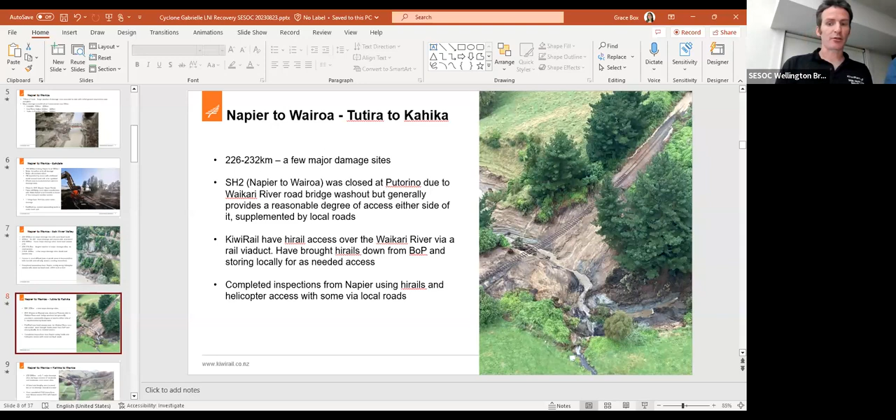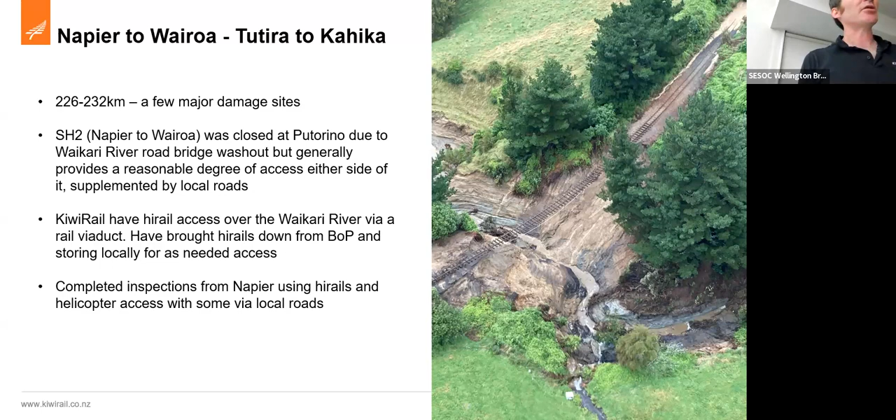Sweet, so big washout here. That was a 1.5 by 2 meter old arch culvert, so it's not like it was a bridge that washed out. It's about 50 to 55 meters long, that bit of hanging track, and about 15 meters deep. And it wasn't even a named stream that did that.

Then Kahika, all the way to Wairoa. Not meaning to downplay the damage, because there is a lot, but it's far more the equivalent of a major storm event for us. Only one major damage site, quite a few moderate and tons of minor ones, but it's not the sort of stuff that we would enter into with an alliance to deal with.

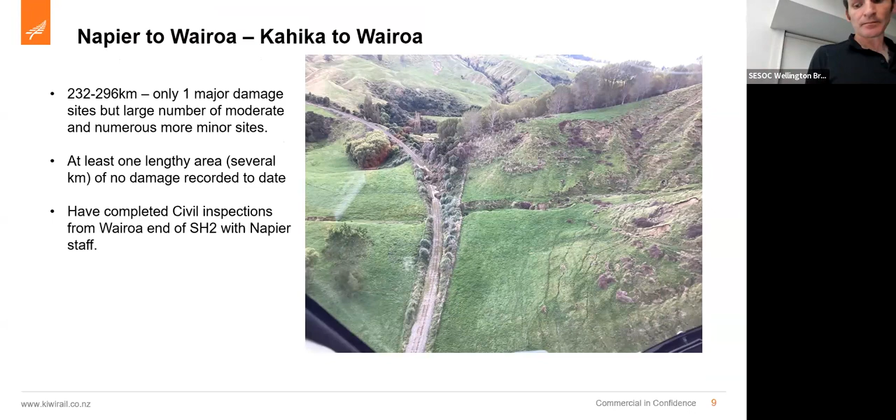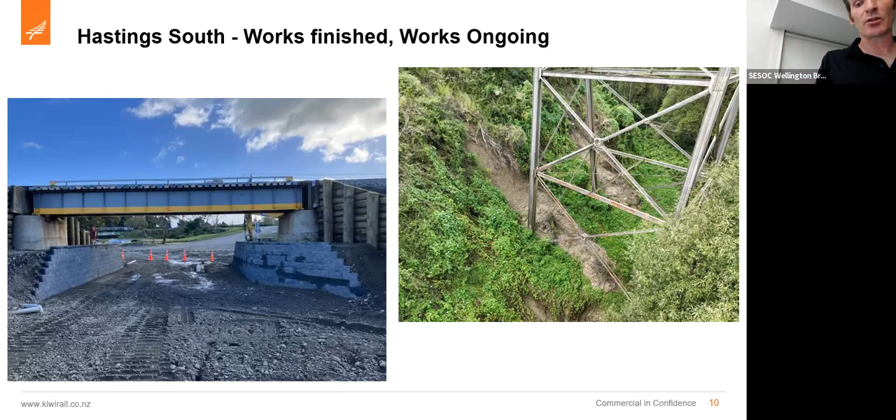But then the bigger piece, and we're going to spend a bit of time on this one, is between Napier and Hastings. So starting off with the rivers, because the rivers, and being from Hawke's Bay, I thought I knew the rivers, and learnt an awful lot about them, and also how they've massively shaped the forming of Hawke's Bay.

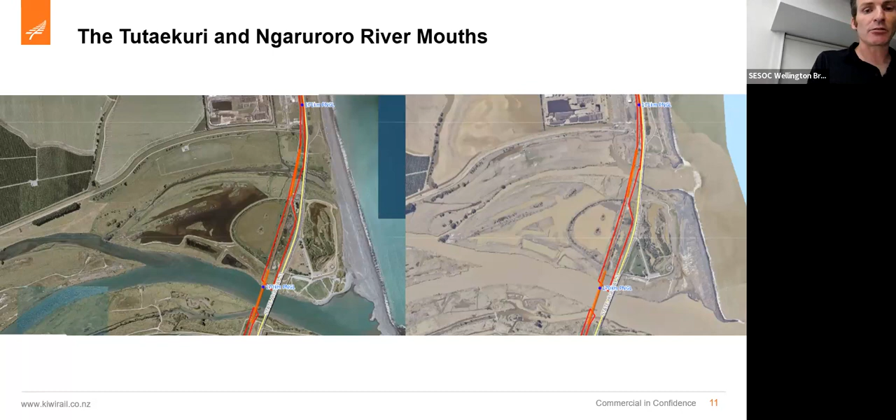And in here, Bridge 217 got taken out. But just stepping out a bit to look at, it's not Hawke's Bay as a whole, but it's the area between Heretaunga, Hastings, and Napier Ahuriri. So you've got the Tutaekuri as the upper river, and the Ngaruroro, and you can again see a nice green area, and then very brown is the Ngaruroro.

It didn't blow its banks, it overtopped, and it overtopped into Pakawhai, which is in between, and it overtopped into Twyford and some other areas down the bottom of the screen. At the same time, the Tutaekuri blew its banks in a whole number of places—I can't tell you exactly how many, but I'm pretty sure it's over a dozen. Massively, it blew its banks at Awatoto, and the water went 3.5 kilometres north, along an area with Ravensdown, a tannery, some animal processing plants and such, and caused a huge toxic hazard.

So when we were going in there, we had to be in hazmat suits, and they'd wash your vehicles down and stuff. It was full on in there, and that water combining took out Bridge 217, and I'll show you that in a bit. But first, a bit of the history of these rivers—I knew some of it, but learned a bunch more.

So the Tutaekuri used to flow and outlet up in Ahuriri, probably about 8 kilometres north of there. In the 1920s, it was causing lots of flooding problems, so there were schemes to divert it. Then the Hawke's Bay earthquake happens in '31, kills about 80-something people in Hastings, over 100 in Napier, and causes massive uplift—metres of uplift—which makes diverting the Tutaekuri even more pressing.

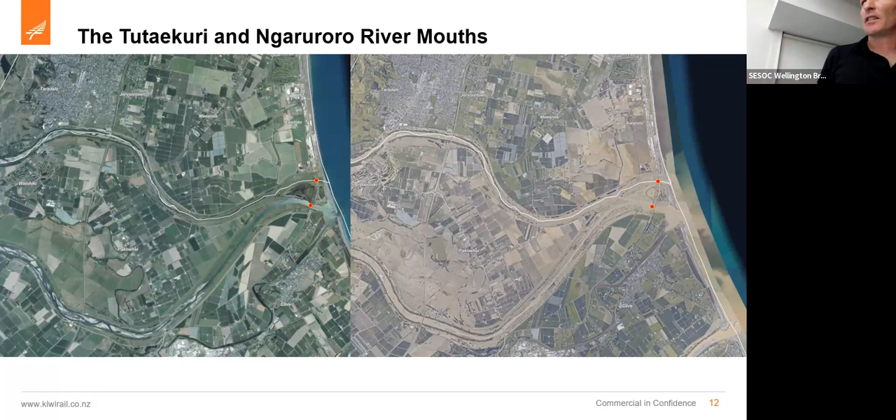And actually the cyclones proved it was somewhat resilient, but not so for Bridge 217. So that's what it looks like after the storm.

So I mentioned all of that damage up at Awatoto. There was no water there before—this is probably the Waitangi stream, I think—and it's become a bit more part of the Tutaekuri. So that 1960s change, most of the water from the Tutaekuri got diverted to go under Bridge 216, and this is just a bit of an outlet.

Some people—there were proposals to change the road bridge into a culvert back in about 2004. Railways objected to it. I don't know if any of the people that objected are in the room, but I thought that was quite a smart thing to do, because it's shown it does need to be a substantial waterway.

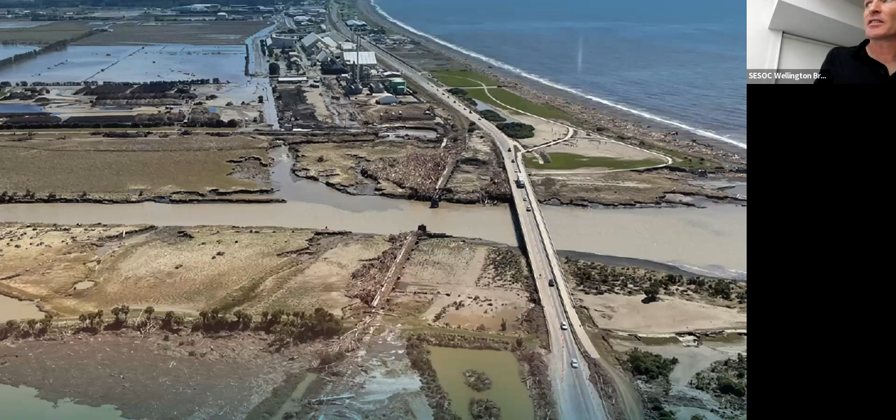Yeah, so look, that's what it looked like straight after. You can see the debris and such, the missing bridge. And that's what it looks like on Monday, I think that photo's taken. So yeah, it's been a great bit of work, and we're hoping to open that in September.

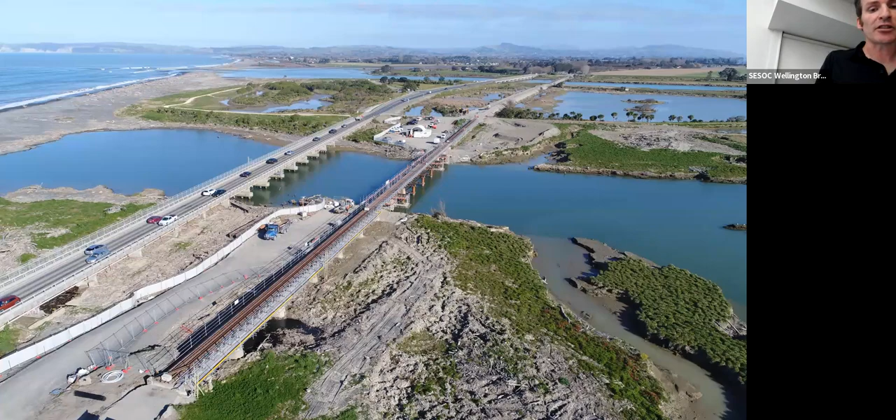There's still a bunch of work to do. The rail's not on the bridge yet, but a lot of other stuff is. And there's another view.

This one's not so much about bridging, but I'll talk about Eskdale a bit, and it's about rivers. So here's Pete Marsh, the ganger for Napier and Wairoa, standing on what used to be the railway track. I think it's on its original alignment, but certainly not in the upper picture. You can see the railway track here, another bit over there, and a car that's almost impaled with rail all over the place.

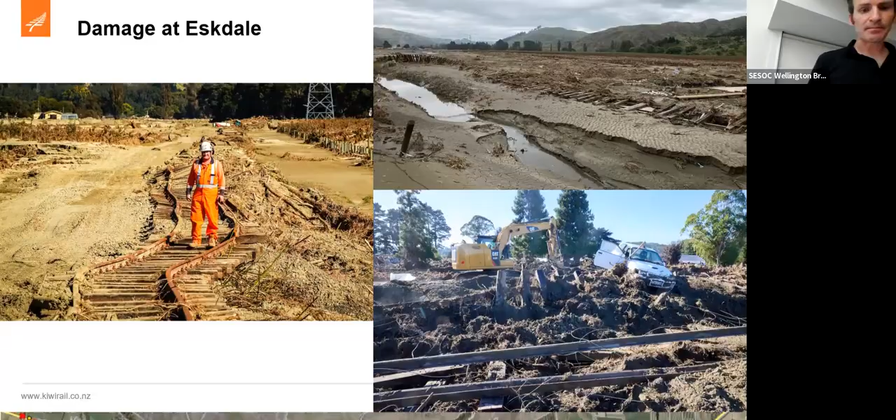Again, before and after - the green is before, and Eskdale's awesome. Well, Eskdale used to be awesome, sorry. Lots of vineyards, breweries, there was a girls' boarding school, Hukarere, lots of cool stuff at Eskdale. Bank to bank, pretty much the hills on either side of Eskdale is where the water and silt reached, and you've got that brown sway through there. So Eskdale is hugely affected, and the rail as well.

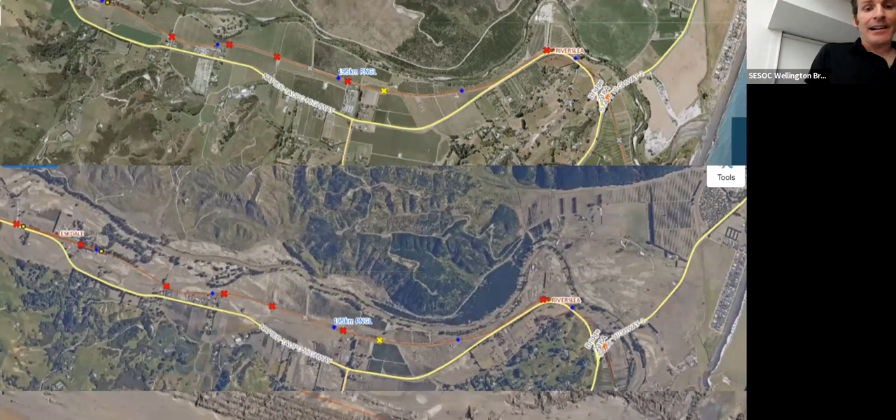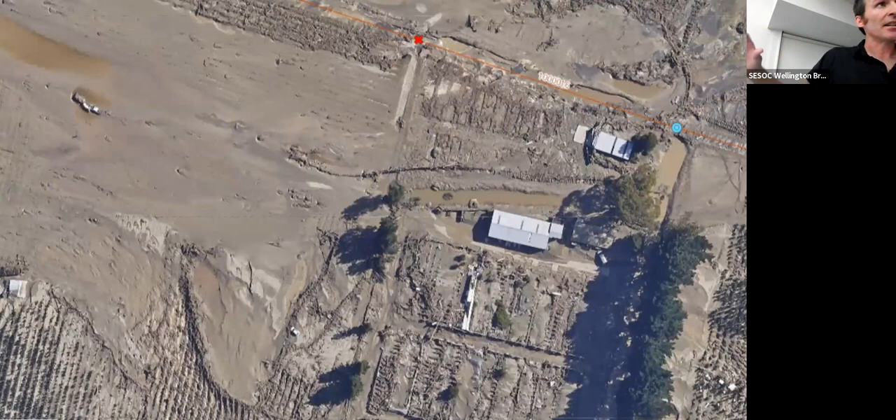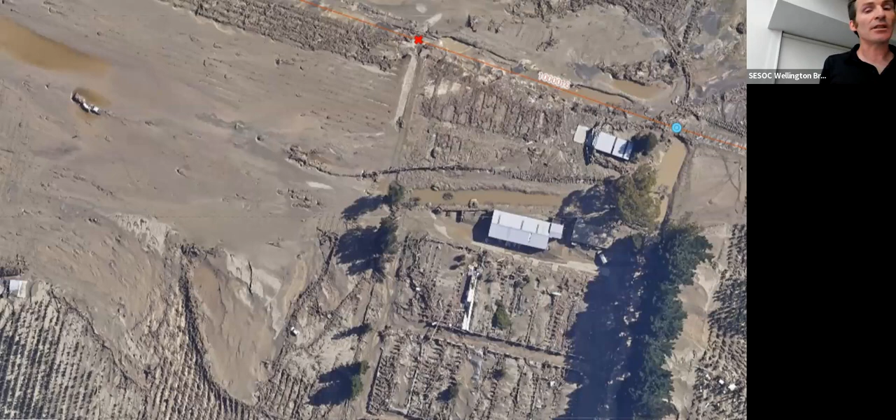That red line is the rail alignment, and some points of interest - hopefully you can see the mouse. That's a piece of rail track that wrapped around that top building and actually partly destroyed it. That car you saw in the other photo, that's the white dot down the bottom that's got the rail wrapped around it again - it's moved a couple hundred meters, and rail's not light. It has a bit of strength, but the river just ripped it, and all of that was orchard with hundreds of posts that have been completely destroyed and taken out.

Just on the embankment washout I mentioned, here's a couple more. They're not quite as big, but still pretty substantial. That's at Waipunga, in the Esk River Valley, and Waikoau, a bit further north - so they're actually different ones. We've got about 5 of this scale, 6, I forget. They're the big issue for us in that area, and it's getting to them.

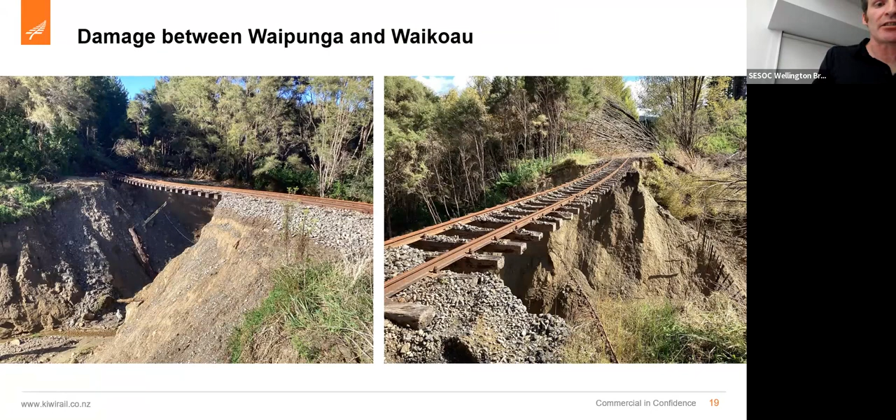I'll go through this quite quick because I've talked about some of this before, but I mentioned the standard way of assessing - we massively geared ourselves up to use mobile tools, phones and handheld apps, and that hugely sped up the process of doing all the damage assessments, figuring out the 401 damage sites we've had to deal with and categorising them.

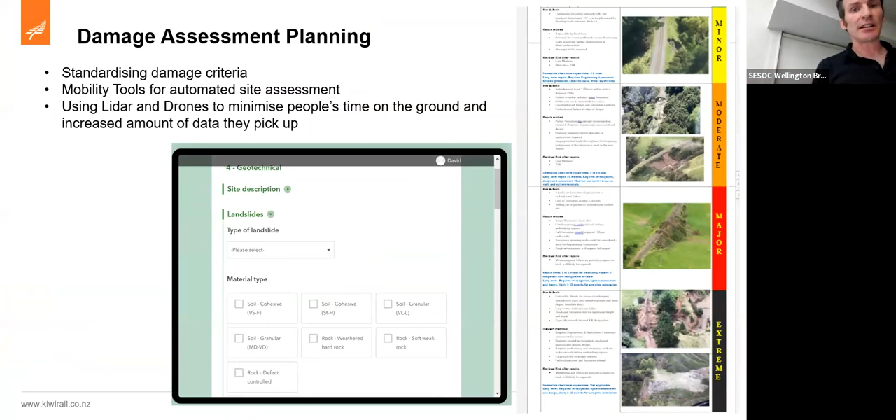And then a lot of use of other digital tools. We've GIS'd all that, and people have done reports in the field that's all been uploaded. We started off a little bit slow with this stuff - it was slower than the Kaikoura response - but then it massively transitioned, giving people an idea of this could be done a bit better, or could you use this tool. It transitioned to probably half the time and 3 times the amount of information we got in Kaikoura.

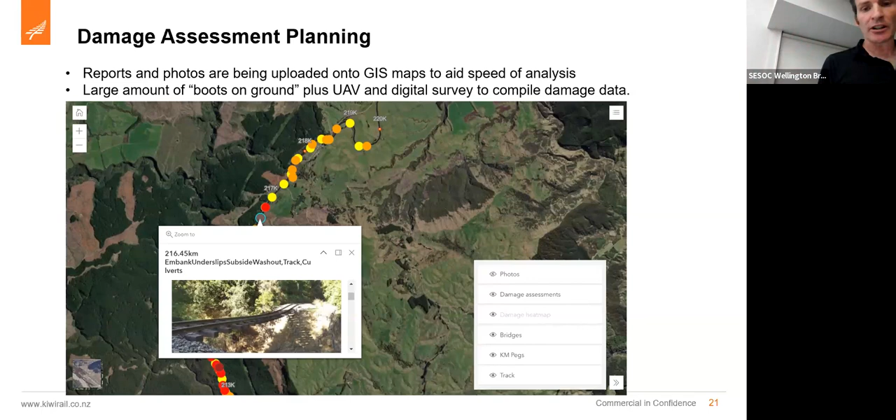And a lot of use of drones. What information you can get with drones, and the ease of doing it, is increasing all the time. WSP did Holt Forest Road, just south of Tūtira, but KiwiRail's own team did this other one - that's State Highway 5 to intersection. And that's as good as LiDAR information for pulling measurements and such off it.

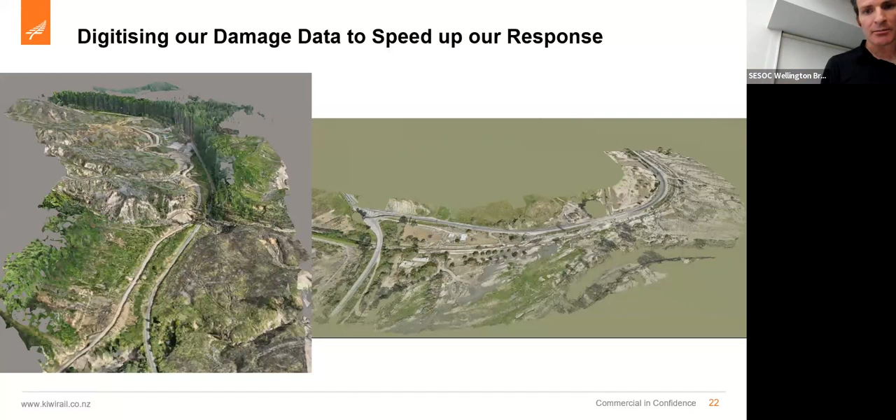So yeah, hugely handy. I think I'm coming to the end of mine, but yeah, we're into bridges, and it's Phil.

That's such a good talk, and there are going to be so many questions - whether we should park the bridges for another session, because we're working through those right now. How do people feel about that? And we should ask Daniel questions - that's what I think we should do. I'm happy to do it, but I reckon that would be more valuable, Daniel. I'm fine either way. See if we have questions. Questions?

You know any idea what the cost of it is? Yes. It's getting worked through with those that will make decisions on the costs, but it's going to be more than $10 million, and it'll be less than $1 billion.

Look, all of that assessment work was hugely useful, and the team really smashed it out to get tons of information that's allowed us to do assessments and get costing together, which all need to get refined, because what's the first thing you do with an estimate? Try and improve on it. But we do have ideas about how much certain things are going to cost.

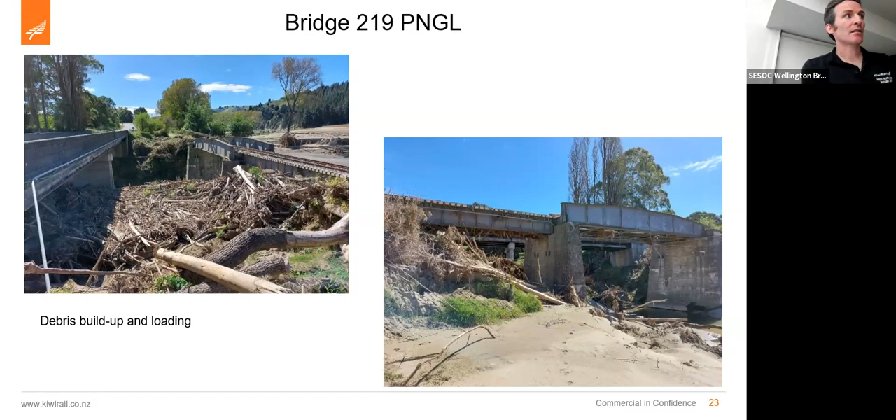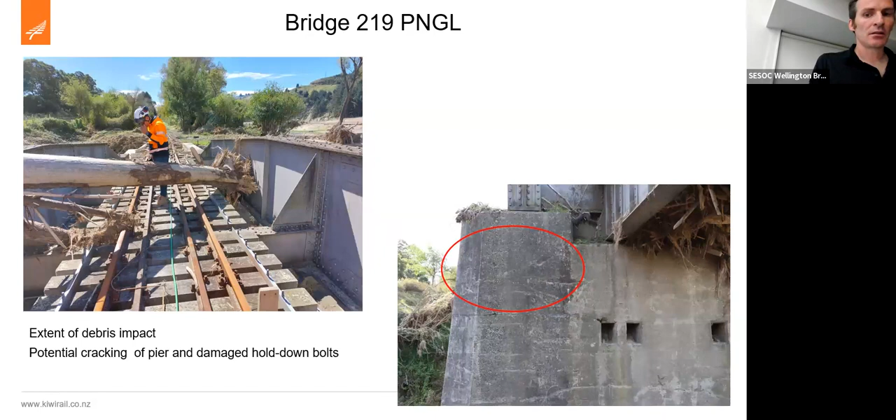That's just a question leading off that, well, it's just about the planning for a design thing. That's the thing about an alternative flow path or something to go there. I'm thinking about that, just working through this. Yeah, come back to that.

I was thinking these photos are worth looking at, but also that they help answer some of the questions. So that 1938 flood through Esk Valley that people use as a comparison, we've got records of where that reached on our bridge. And again, hopefully you can see the mouse. I need to get in the right spot. It's about there. That's where the flood level reached in the 1938 flood.

And I don't think it got to the top chord, but it got over the bottom enough to get debris on the top chord, like you can see. So possibly 5 meters higher than the '38. And yeah, so levels of event, is it going to be more common, bigger events, is one thing. Now, sorry, I got myself distracted as I was answering that. Did you have another question?

What our guys are doing is trying to think through what are some alternative pathways or some other ways to think about other diversion paths or how to deal with this. Yeah, okay. And that did prompt something. Did a lot of reading, got the old Bridge 219 file, read all that, and that has great history of the area. And it referenced various reports, Hawke's Bay Regional Council reports, which are online.

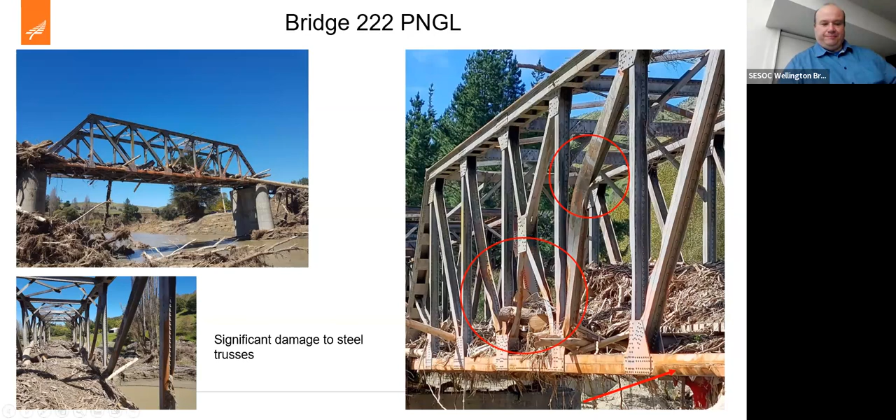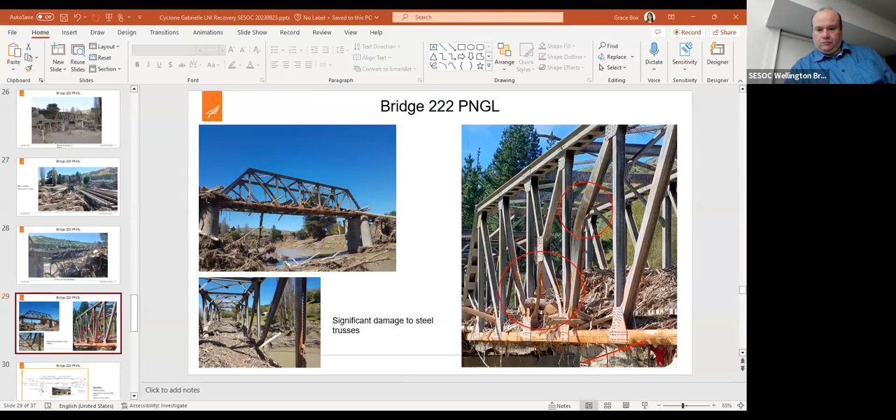That's great. Daniel. So let's change over. My questions? It's just such a great privilege to come here today. Sorry, we've got to stand behind the screen. Oh, I see. I do talk. Oh, I see. We thought, let's get on. I'm not even going to introduce you because you're going to do it. But Don, tell us a bit.

Oh my goodness. I feel humbled and privileged to be here tonight. First of all, I'd like to thank everyone who supported me in my career, and there's just too many names to mention, too many firms have supported me. There's just so many wonderful people out there. And I'm just a very ordinary New Zealand boy grown up in small town New Zealand, trying to scratch out a living in the real world sort of thing. So there's nothing special where I've come from particularly. Well, that's the first bit.

Tell us about... Well, I was lucky enough to find the woman of my dreams at university, so that's solved a lot of problems. And she's put up with me. She deserves a medal actually for putting up with me for so long. We were happily married 20 years ago. And I have two relatively young daughters. The oldest is studying law at Auckland University, and the youngest is at Wellington Girls College. So, yeah.

I'm not sure if we showed some sign of appreciation. Hey, we haven't finished. Oh, I thought we'd finished. No. I think everybody's going to see this. Pressure of time, 9 minutes. Nice. How long do I have? I thought I had 20 to do the presentation. Is that not the case? I'm going to flick through really quickly then. Okay, 1 second. Yeah, it's these small problems. Okay, just this. Sorry, everybody. I thought I had to do a presentation.

Right, so just very quickly, I was educated at the University of Canterbury. I was in the era of Park, Paulay and Priestley, and a feature of that was a very social sort of thing. I used to go to drinks at Professor Park's house on a Friday night, which was very entertaining. The likes of Rob Park and Ka Ching Chung were running around in those days. So that's how far we go back.

I started life at Morrison Cooper and Partners in Wellington, which became Kingston Morrison, Sinclair Knight Merz. Eventually moved on to Holmes Consulting, and then eventually started Novare Design. My first mentor was Colonel Commandant George Butcher, who a lot of people here would know, one of the old school civil engineers who did everything: roads, bridges, buildings, geotechnical reports. I did marine structures, coal stores, water reservoirs, cranes, tall chimneys, you name it. And eventually moved on to geothermal power plants.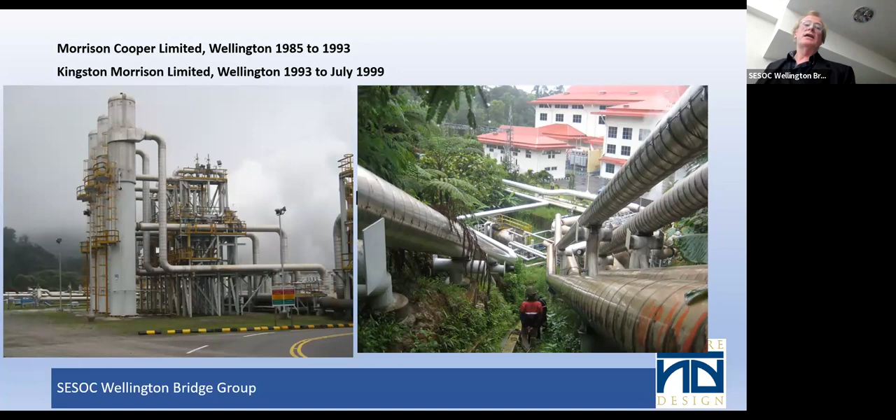I just want to give a sprinkling of things I was involved with. This is the Tiwai Point aluminium smelter. The crane up above is the best photo I could get - that's a 130-tonne crane designed by yours truly. That's to lift the pot - one pot out of the aluminium smelter - to lift the pots out and work on them, clean them up, and put them back in.

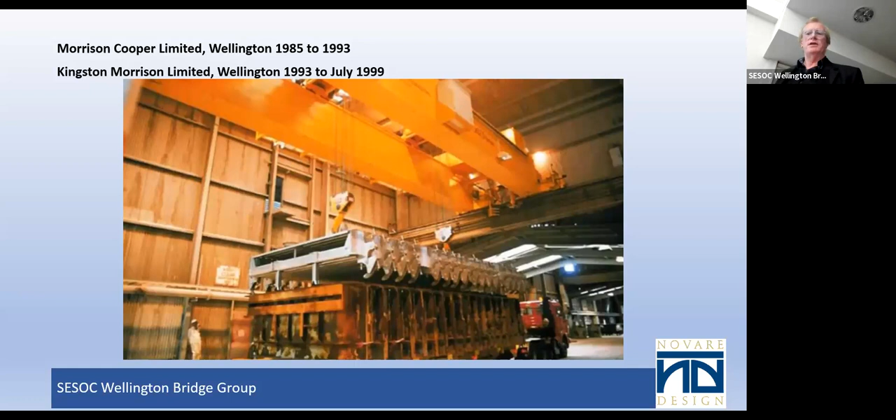I just wanted to share some more amusing things. We got a phone call at Holmes one Wednesday - 'Oh, we've had a flood, a power station in the Philippines flooded. Have you got some guys that can design a flood fix? We like New Zealand engineers.' I put up my hand. Rob Park designed a concrete wall, I designed the steel one. By Friday, this guy rang up and said, 'Can one of you fly over here on Monday? We want to implement it.'

That also led to all sorts of adventures. We went over to the Philippines and met all sorts of people. I got a bridge for Holmes to design over the Balkan River on that particular trip.

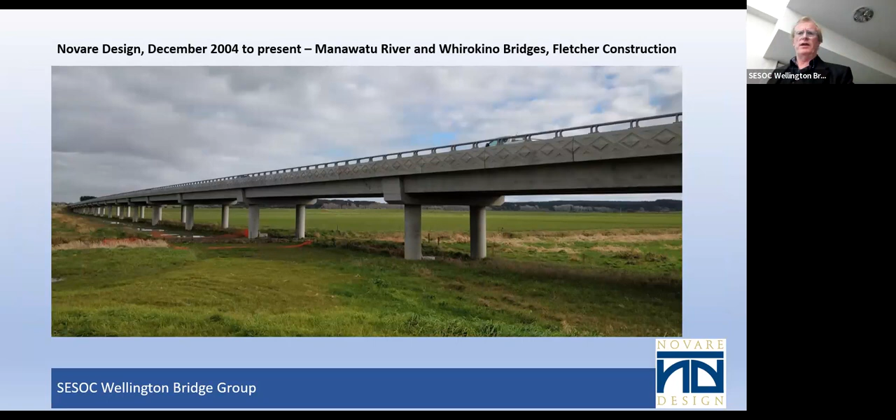Moving on to Novare, some significant projects. Obviously there's the Whirokino bridges, which we very successfully delivered, and Manawatu bridges with Fletcher Construction - nearly a kilometre of bridges. There was the Kawarau Falls Bridge, which I managed, a launch construction curved over the Kawarau River.

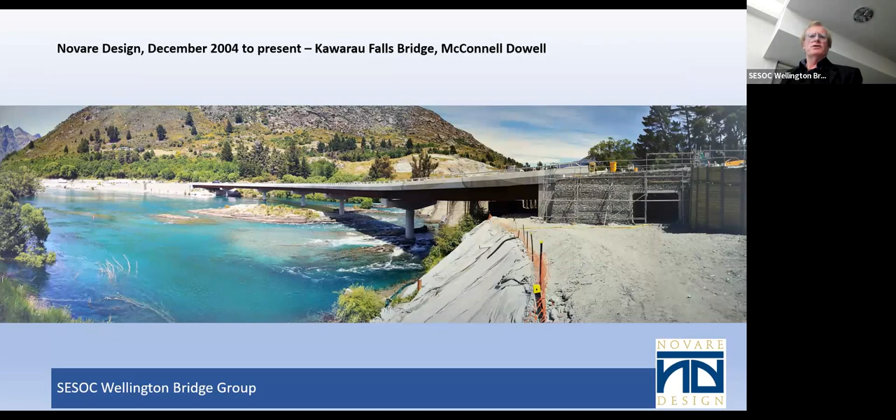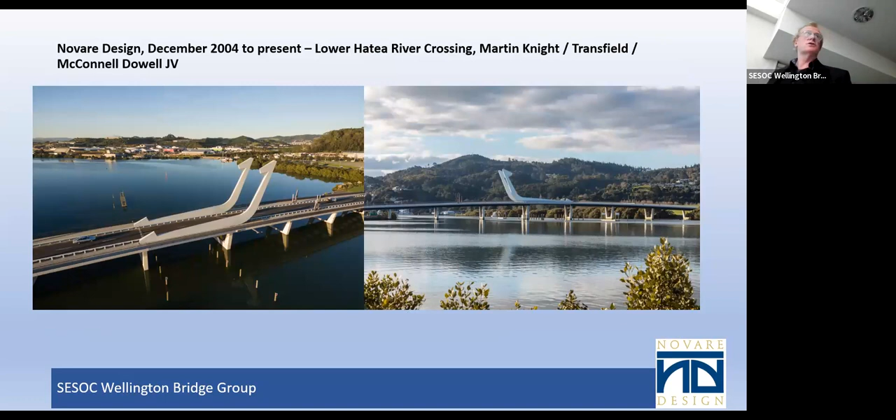I took over the Lower Hatea project after we merged with Peterson Chung, and everybody on the project became part of Novare. Another really interesting approach was to show that we don't just do bridges.

I've been involved in the modelling of the penstocks for Meridian on Benmore Dam. That's their biggest asset in New Zealand - earns over 200 million a year. Again, I said, why are you guys messing with us, you can have anyone you like. But we looked at viscous damping and various systems to protect the seismic vulnerability of the penstocks. It's quite unusual to have concrete penstocks.

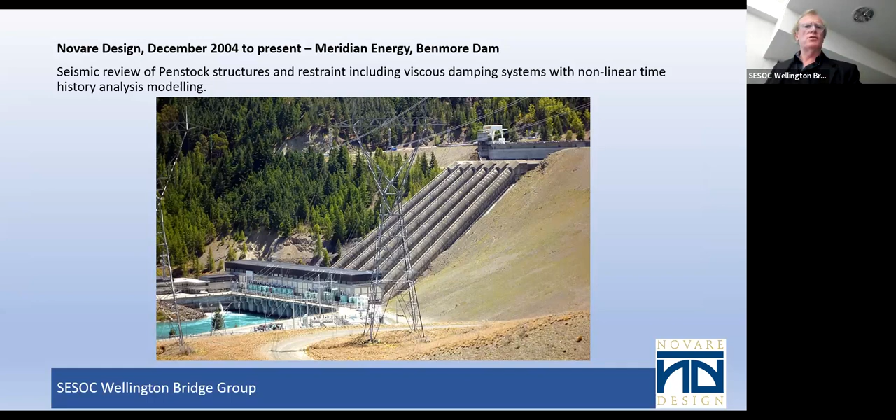Another project, we got involved in the Poseidon P8 hangars for the new military aircraft based at Ohakea. We did all the drawing of the steelwork - surprise, surprise, there's 3,500 tonnes of steel, 22,000 drawings, would you believe. And I like to tell this story - the only reason we got the job is because I did the Australian haka.

Do people know what that is? I was out on Poppy Day, whatever you call it, walking down the street, and some senior defence people approached me - they were all out on the street - and said, 'Dawn, can you buy a poppy?' I thought, better do it, but of course I didn't have any change and they don't take EFTPOS, so I did the Australian haka. The guy was so amused by that. He said, 'That Dawn guy seemed like a bit of a laugh, what does he do?' And someone said, 'He's an engineer.'

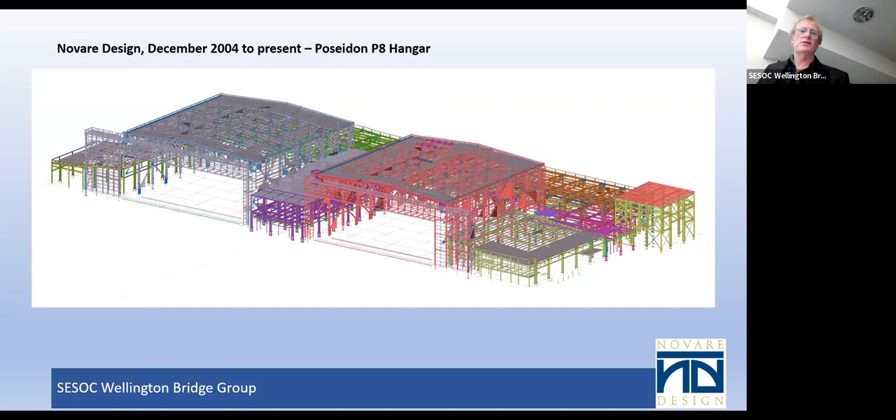And I said, we need some drawing done urgently, because basically what happened was the aircraft were ordered and this was hugely behind schedule, so we helped print it. We worked with Oricon on that - it's their project, Oricon and AECOM.

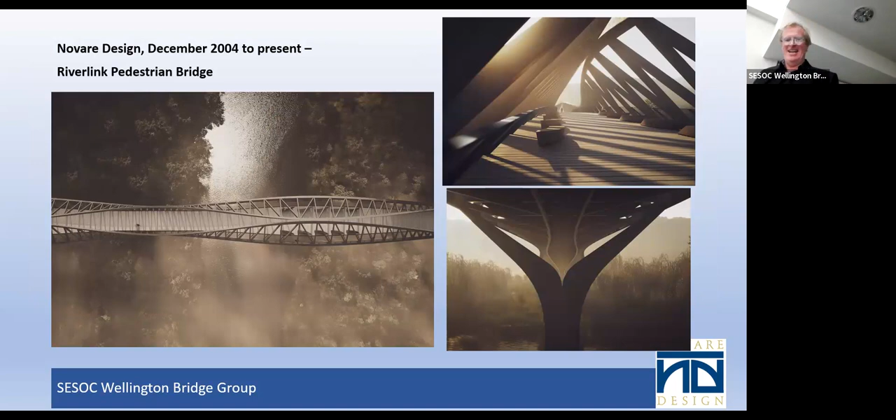Our latest project, which I'm very proud of, was the Riverlink Bridge. I'm not even sure I'm allowed to show this, but this is a pedestrian bridge. It's very exciting, hopefully we can afford it. And Wayne's in the room, aren't you? Yeah, anyway, there's lots of excitement over that at the moment.

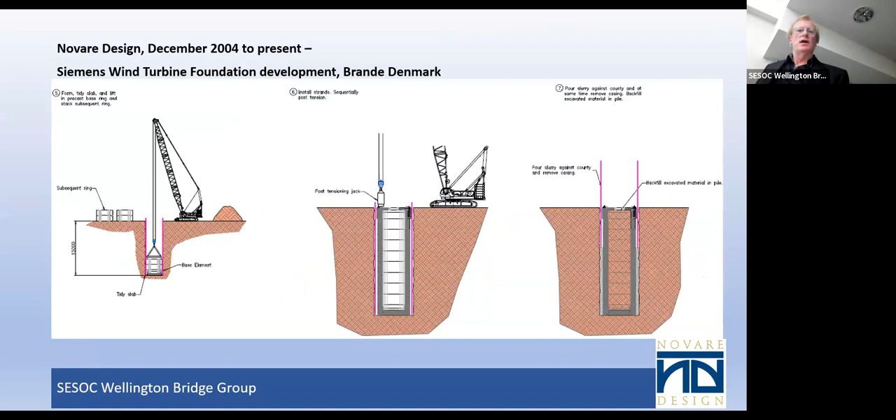Here's the funniest story of all, if I've got time to tell it. We get a lot of people ringing us saying, we want you to design a signature bridge, or we want this. We got a call from Paris, a guy saying, Monsieur Pierre Galinie, he goes, I want you to design a bridge. And we're like, well, how many? We thought it was a Nigerian banking scheme.

I said, you know, it's like, oh, you give us your bank account number and we'll connect it. Anyway, I was actually really rude. I said, if this guy's real, you'll get your bum on a plane and be over here. Well, 3 days later, he turned up. And I said, we're still not going to be paid. Anyway, to cut a long story short, he said, I want you to design this new bridge in New Caledonia.

So next thing we had, and it has to be Euro standards, and all the contracts are in French. So we had our schoolboy French books out and Google translations of contracts. I said, I know we're going to get in trouble here. But anyway, we did the job.

And you know what the French are like? They love complaining, but it's not because they like complaining, it's because it raises the standard. You know, well, this cheese isn't quite right with this wine. But anyway, I said to this guy, it's so funny on reflection. So we did this job.

First of all, the big surprise was, Richard Raymond said, there's 40,000 euros gone into our account. I was like, oh, here's the big doubter. Anyway, wait for this. We designed this bridge, and I said, well, let's ask how we did.

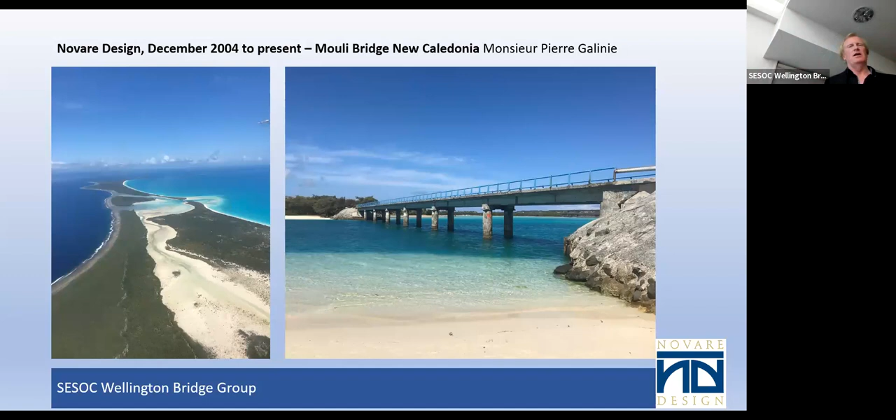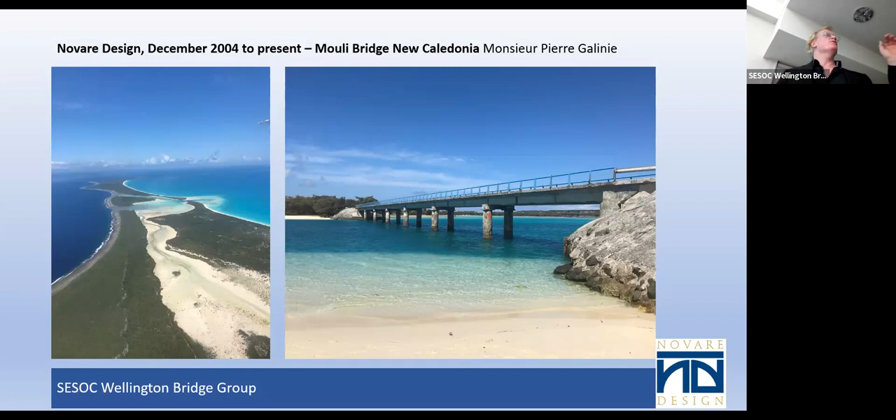And it turns out in the French translation, so we had a $100,000 fee to put it in context, he only wanted a concept design that we could've put together in a morning. Can you imagine the money we would have made? Anyway, so that was all from a call from Paris.

The other really exciting job I want to finish with - I could tell you how great I designed this beam, but that's just boring. We do a lot of zip lines and high ropes courses, and we got asked to do a truly exciting one: a 250-metre zip line over the river, in a place called Kaohsiung.

It's like the second largest city in Taiwan. The river is called the Love River, believe it or not. 250 metres - you can probably see a tiger beer sign. That's a 5-storey high climbing wall, with people climbing up, 2 zip lines and all the safety gear. We designed it all from our Auckland office for the Tiger Beer Festival.

Anyway, cut a long story short, we designed it all, and the client said at the 11th hour, look, if something goes wrong with this, we're going to need some expertise in Taiwan to deal with problems. Would anyone be available? Of course, it came to me, and I said, well, it's obviously a job for senior me, the most experienced, to go to the beer festival.

I said it to Matt Spooner, who's in the room today, and I could see the look on his face - he'd done all the design work and hard work. I said, just kidding, Matt, off you go to the hardship posting in Taiwan.

And he spent a week there on full pay, just monitoring things and monitoring these zip lines, but there were 4-hour queues to them. They asked us to come back and do 4 more the following year. It hasn't happened, but very, very exciting project. I know these are small beer in terms of fees and scale, but some very complex engineering, because this is all temporary. That 5-story structure you see, the zip lines, and all the cables, this was all designed here and implemented in another country, safely happened, and was all dismantled, and no one was hurt, and it was a great time.

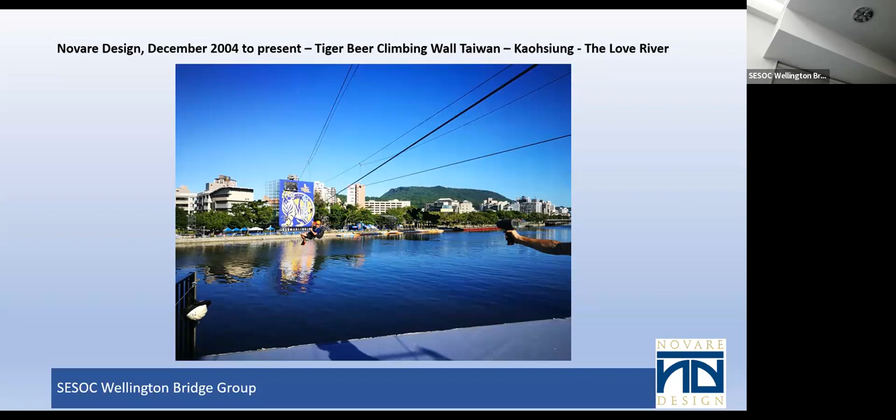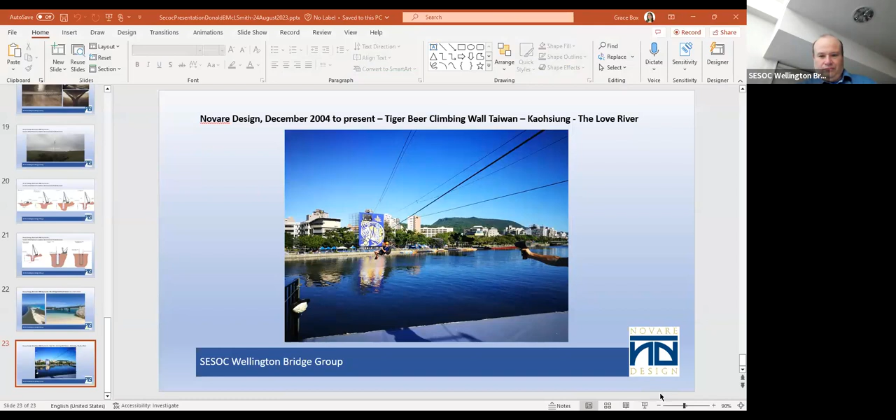On to the presentation, which is on Seatoun Tunnel seismic strengthening. We all know where the tunnel is — it's basically a critical heritage asset in Wellington, providing access to the suburb of Seatoun. The portals were identified as being vulnerable to seismic shaking.

So we get a combined presentation from Brabhaharan and Bojan Radosavljevic. Bojan, I suppose it's not very often people pronounce your surname without mixing it around. So who is the first presenter? Brava. Okay. Who is it?

Thanks very much. There.

So there's a little tunnel — I feel a bit underwhelmed compared to all the structures Don was showing us. There's a little tunnel in Wellington leading to the suburb of Seatoun.

So we did some seismic strengthening, and I'm going to talk about today with my co-author Bojan, who built or did the strengthening work, and also acknowledge people who have worked on the project with me, in particular Guna Mukaya, who was involved in the design and construction.

So if we can get this to work. Okay, it's working now.

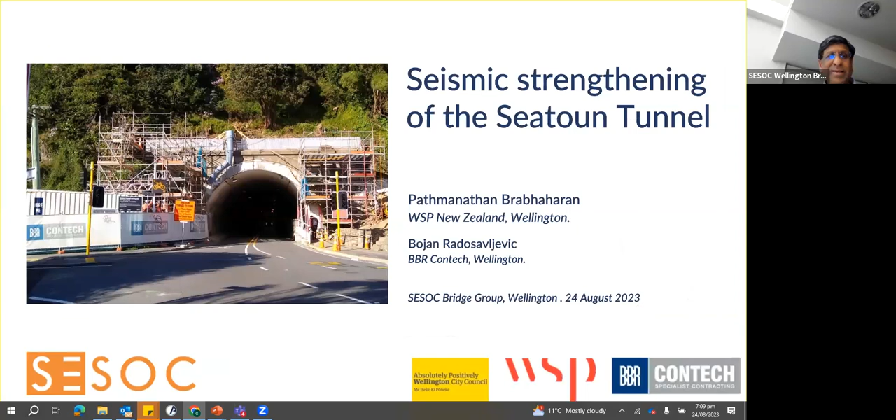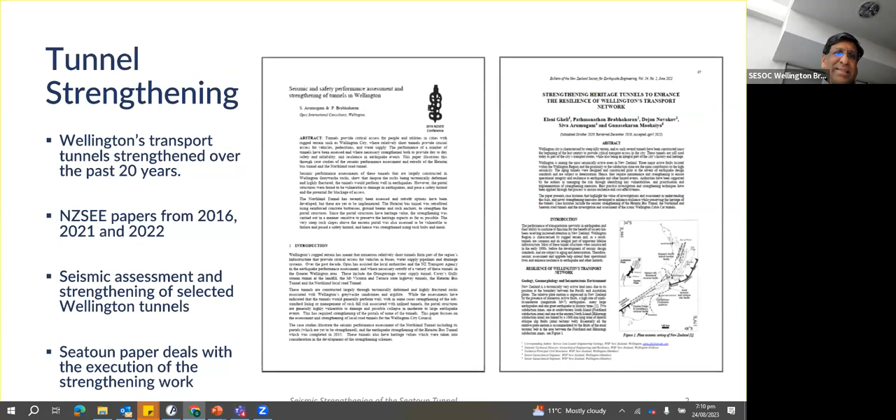So in Wellington, there are a number of road tunnels which have been strengthened over the past 20 years. This was one of the last of the tunnels for Wellington City Council which was strengthened, and there are a number of papers here which deal with that work. But today I'm going to talk about this particular tunnel, which is the Seatoun Tunnel.

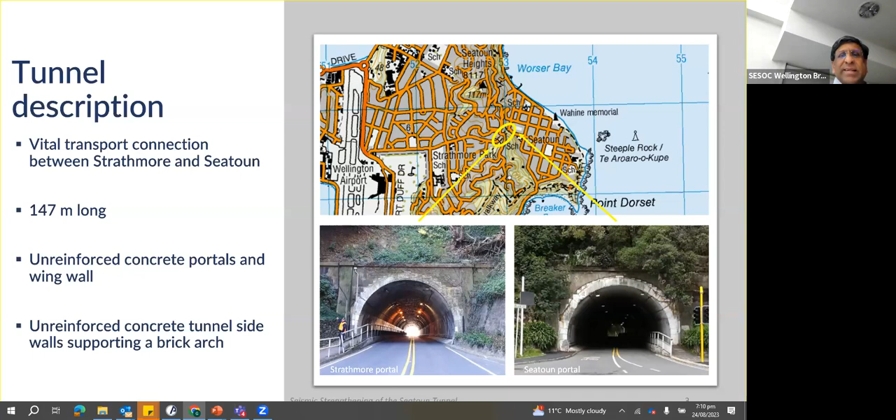It is a 147-meter long tunnel, so a tiny little tunnel. It's got unreinforced concrete portals and wing walls, and unreinforced concrete tunnel walls with brick arch above. This tunnel was built way back in 1906-1907 using manual labor — you can see the diagrams and photographs from the time of construction, probably with even less safety than the ones Don talked about. You can also see the very variable ground conditions in those photographs, which we had to deal with in the strengthening work.

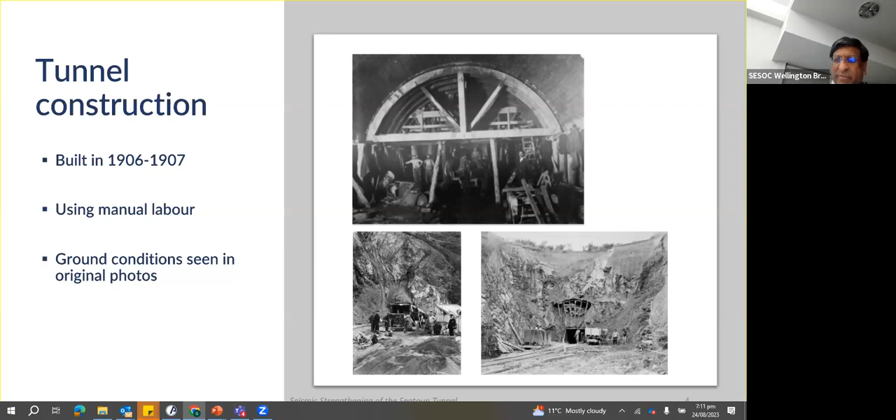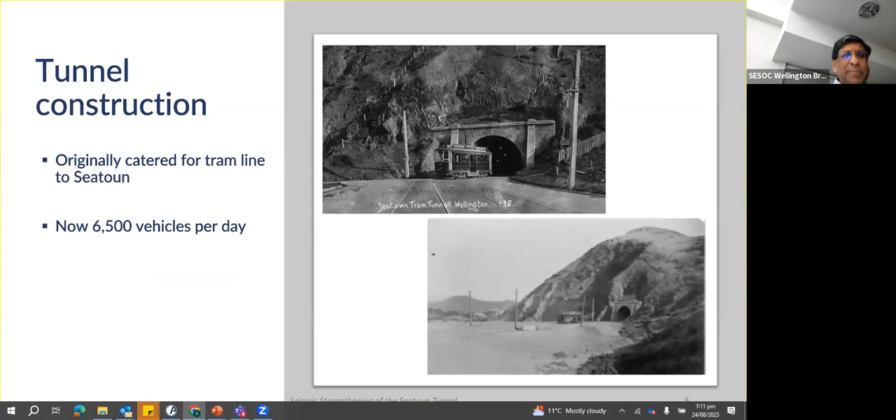Originally it catered for a tram line. The tunnel was formed, the tram line was put in, which enabled the suburb of Seatoun to develop because you had access through those hills. Now it's a road tunnel which carries about 6,500 vehicles a day, and you can see some historic photographs from when the tunnel was opened in December 1907.

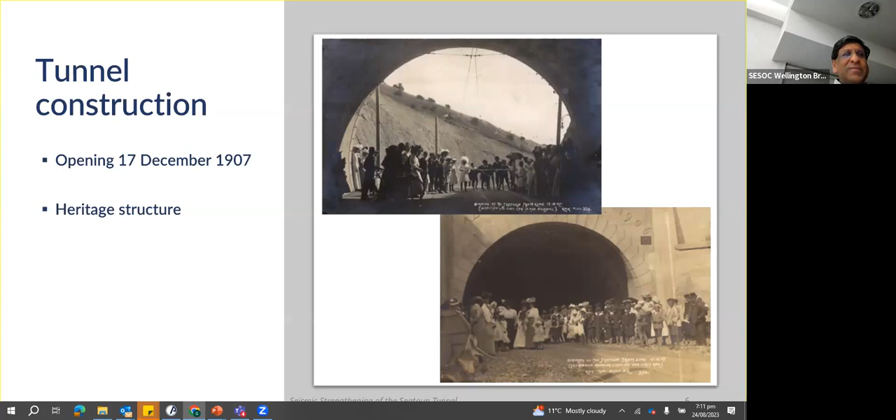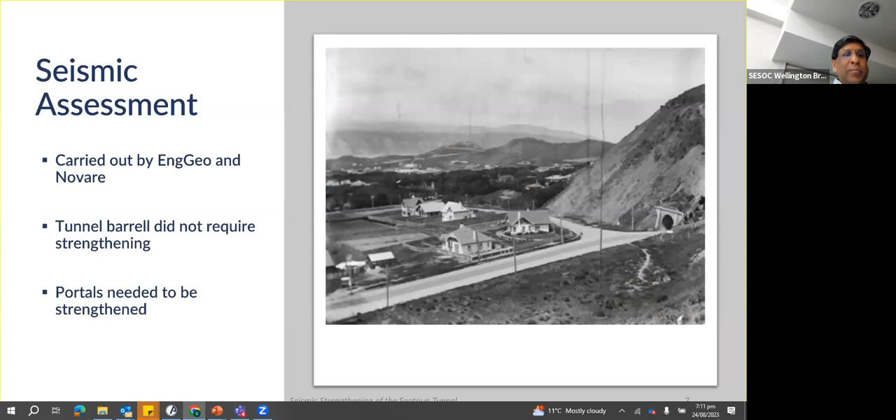It's a heritage structure, a Class 2 heritage structure, so we had to take that on board in doing the strengthening. The original seismic assessment was done by EngGeo and Novare, and the tunnel barrel was assessed not to require strengthening, but the portals required strengthening.

So we got engaged — Opus WSP engaged to do the design and construction management. The key drivers we had to deal with are the heritage aspects, because being a heritage structure, we needed to preserve the heritage fabric of the tunnel portals, and also resilience, because eventually what council wanted was a resilient link to Seatoun in the event of major earthquakes.

So to achieve that, we put in some hidden structures. We put in a reinforced concrete beam behind the portal wall, and some overlays across the buttresses on either side of the tunnel opening. We had a number of anchors hidden into the structure so that you can't see them, which are the most important elements of the strengthening.

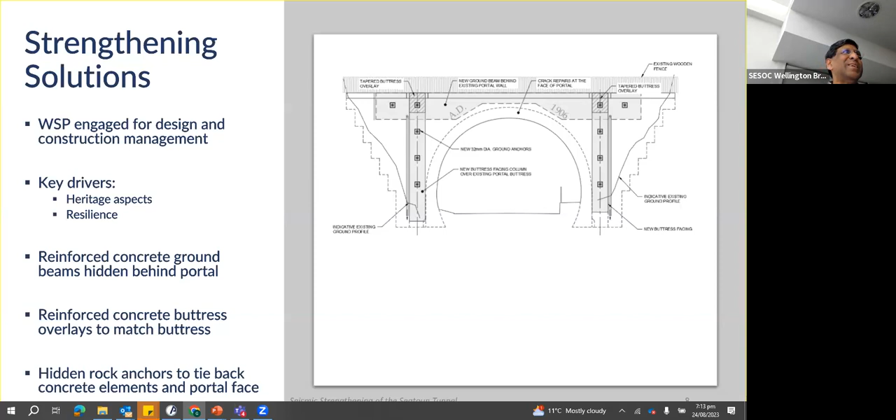Some key things about the work: the anchor heads were concealed in the portal face, as I said, and we also carried out extensive concrete repairs and painting of the strengthened structure. There was also an ancillary retaining wall on the Strathmore side, which was also strengthened with a concrete beam and anchors. You can see here the concrete beam behind the portal and the overlay on the buttress, and the anchors anchoring back into rock.

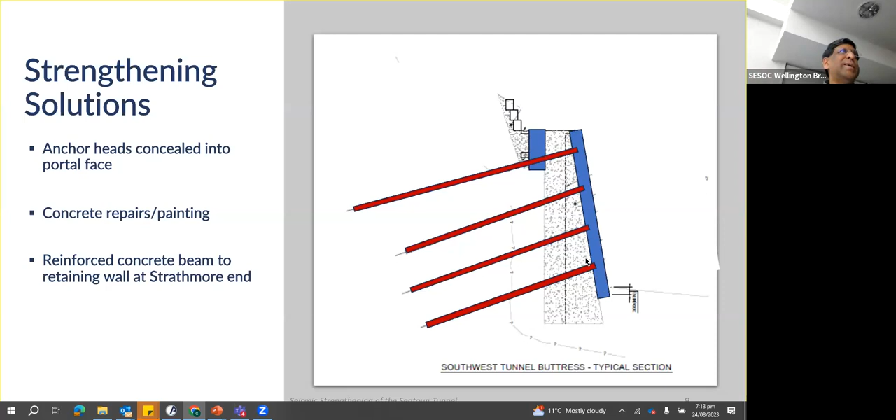Some of the key things were to do with the anchor features. The anchors are ductile and are able to yield if you had larger design earthquakes. And when I saw the National Seismic Hazard Model come out last year, I thought, oh good that we had ductile anchors, because now the seismic loads have gone up 50% at least, haven't they?

And these anchors were double corrosion protected, so they were encased in sheaths, so they can provide another 100-odd years of life.

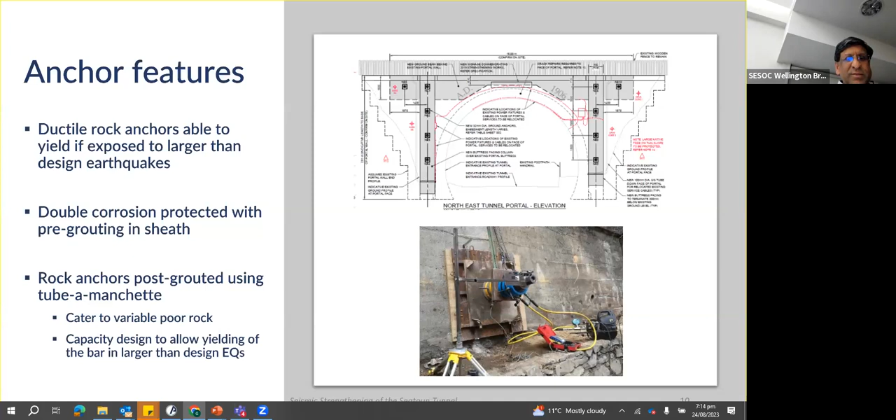And a key thing was the anchors were post-grouted, because the rock was very weak and shattered, and we needed to make sure that we can get good capacity in that rock. So they were post-grouted with a tube-a-manchette system. The post-grouting also helped make sure there is good bond capacity between the rock and the grout, so that if there is an earthquake overload, the bar stretches rather than the anchor failing in a brittle manner. That was quite important as well.

To get this funded and over the line, we needed to do a business case. So one of the key things we were asked to do is develop a single stage business case to get funding from the council and the subsidy from the transport agency.

So we did an economic analysis, taking into account the need to recover quickly after an event, looking at the probability of events and how much the damage and disruption costs were if there was no mitigation, and how much that could be reduced with mitigation measures. From that, we were able to demonstrate that the strengthening work would have a benefit cost ratio of more than 8 - so if you spend $1, you get more than $8 in benefits.

That involved considering alternative routes and disruption costs should the tunnel be closed. Having done that and got the funding, we tendered and got a contractor engaged, and Construction Techniques won the tender. So I'd like to welcome Boyan to talk about the rest.

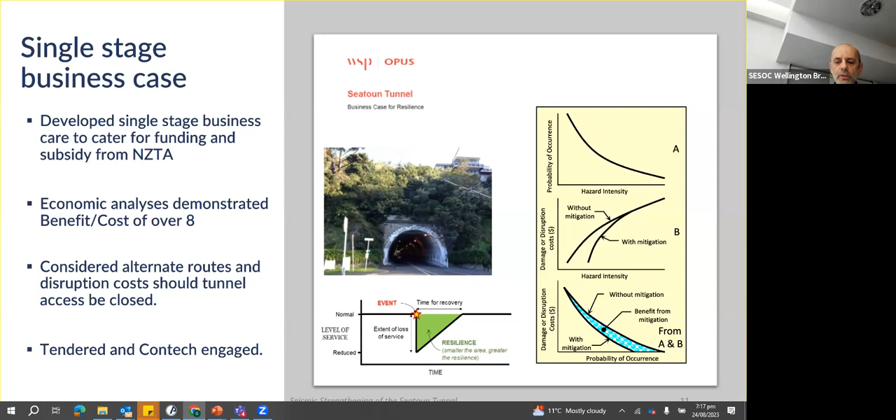The job was awarded in June 2019, and we started on site in August 2019. The contract period was 200 days, I think, and we were fairly comfortable with it, but a couple of items were on a critical path where we couldn't afford any slippage, and one of them was anchoring.

That brings us to trial anchors. A total of 4 anchors were installed to either side of the tunnel, to verify design assumptions for anchor capacity. Trial anchors comprised a 50 mm bar with 2,020 kilonewtons ultimate capacity, about 2.5 times the capacity of production anchors. The reason for that was, one, so we can fail those anchors, and two, so the failure mechanism is in the bond zone.

Trial anchors were installed in accordance with British standards for ground anchoring, using the same drilling method, the same drilling methodology, and the same anchor hole, just to replicate the production anchors. All anchors were tested to failure, and load was applied in multiple cycles.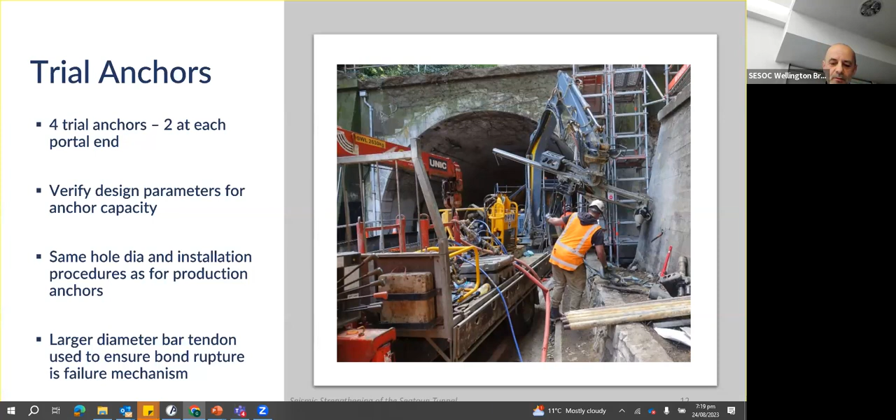So, yeah, all 4 anchors were failed with failing load in the order of 1,000 kilonewtons, which corresponds to a bond capacity in excess of 1 MPa. It was pretty much consistent with the results that we got on similar jobs and similar ground conditions on other projects. The anchors were post-grouted, as Barbara mentioned before, and most of them took about 3 cycles to reach that saturation just around the immediate surrounding of the grout column.

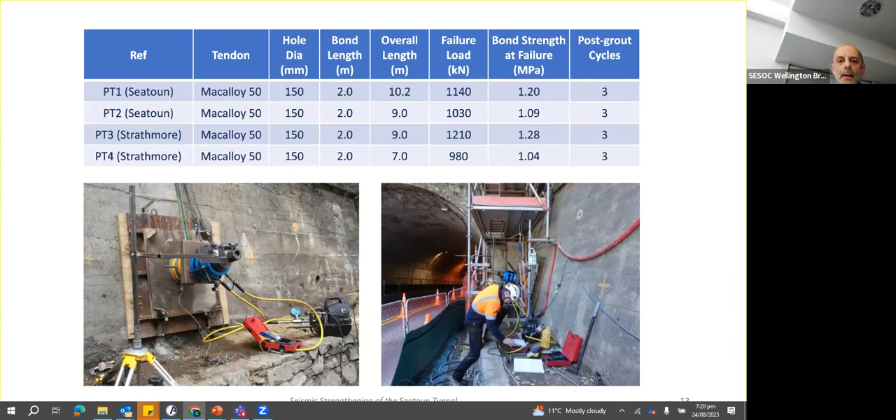Moving on to production anchors, a total of 24 production anchors were installed to tunnel portals and the retaining wall on the Strathmore side. Typical sequence included pre-grouting the bar and corrugated duct in factory conditions at our yard, delivering bar in 6 meter lengths to site, installing the bar and post-grouting, up to 2 to 3 cycles of post-grouting, and finally testing bars. All production anchors were subject to on-site testing, either on-site suitability tests or on-site acceptance tests.

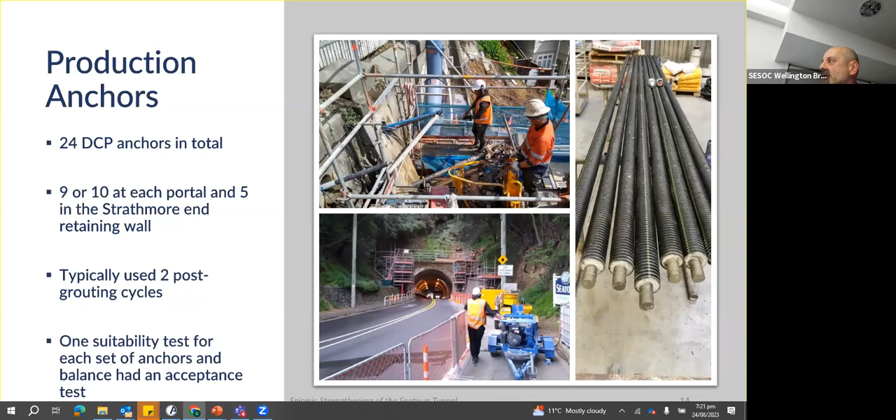Anchor overall length varied from 7 to about 13 meters odd, and that was the result of the location of the underlying rock. It took 2 to 3 cycles of post-grouting for most anchors, and the testing results were pretty much in line with what we expected, and in line with what we got from the trial anchors. The creep was monitored at peak of each cycle, and that was in the order of 0.2 of a mil.

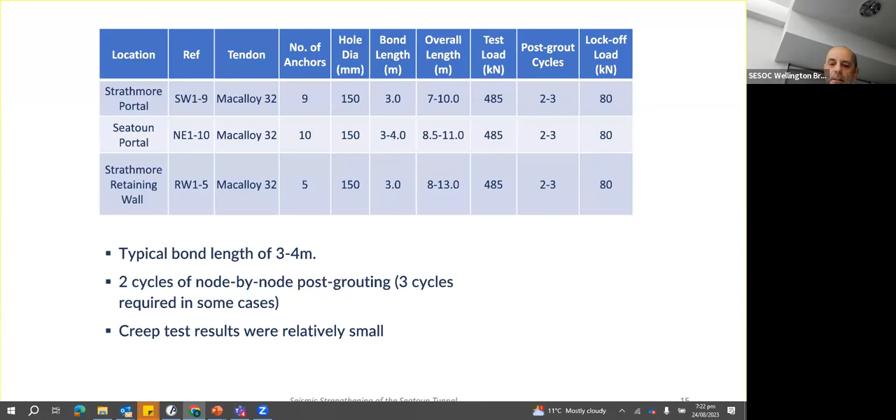Following anchor testing and installation, early in the piece we made a decision that we're going to test all the anchors once all the concrete work was finished. That was purely a practicality, because once the new structure is finished, we can stress the anchors against the new structure. So there was a bit of a risk there in the event that we had anchor failure, which would cause some headaches. But based on our previous experience in similar ground conditions and the results from the trial anchors, we were comfortable that the anchors would perform, and they did.

So once the anchors were installed and locked off, the anchor head recess was filled up with grout. Reinforced concrete buttresses and ground beam, that was pretty standard construction. The only challenge there was the slope behind the ground beam was fairly steep, so it required temporary works during excavation to ensure that the ground remains stable and to provide a safe work environment for the guys.

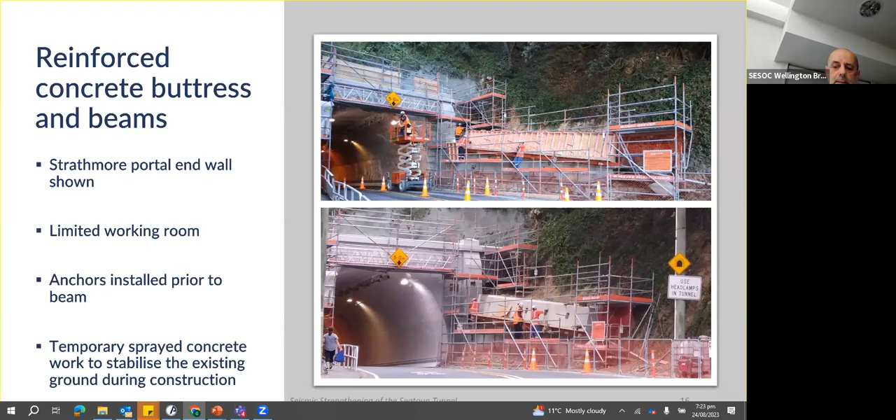Once that was finished, we thought we were on a home run, or so we thought. The only other activities required after that were plastering and painting, and we were looking at finishing the job quite a few weeks ahead of schedule. But then it was early March, COVID happened, and we went into the level 4 lockdown. So all the work was delayed.

Just want to go back to traffic management. Yeah, that was the key factor to successfully completing this job, and that worked pretty well, actually. In those slides, you don't see too many people, but it does get really busy there.

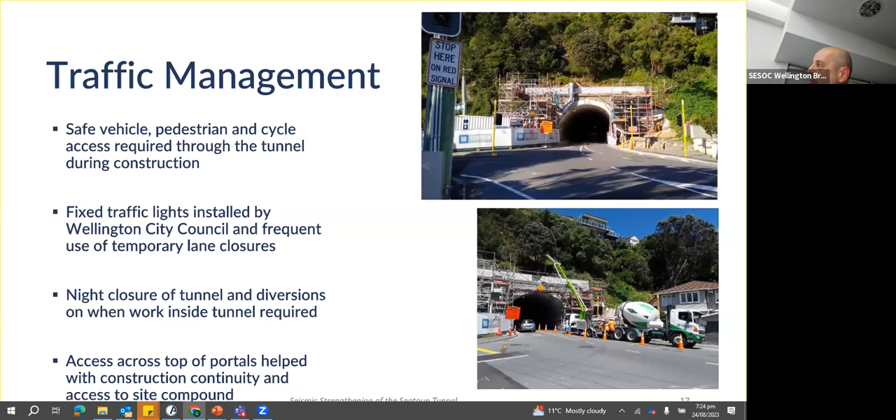So the final result is in those images below. It's a restored and strengthened structure to current standards. Work was finished a few weeks ahead of schedule, even with that lockdown. One of the main achievements for us was that we didn't receive a single public complaint during the works or after, so that was pretty good.

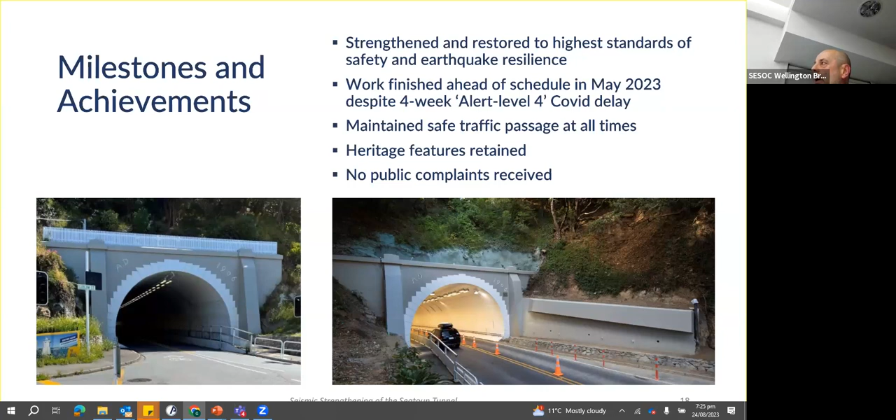I know it's a cliche, and we only say this when something goes all right, but it was a team effort by all parties involved, including WSP, Wellington City Council and the contractor. And I just want to acknowledge our subcontractors on the job: Barrow Construction, Webster Drilling, Plastic Coat, and H2O. So that's us.

Thank you, Brian. Thank you, Barbara. Any questions for either of the two presenters? The question is, did you look at any other options to strengthen the building other than the two beams that you've got?